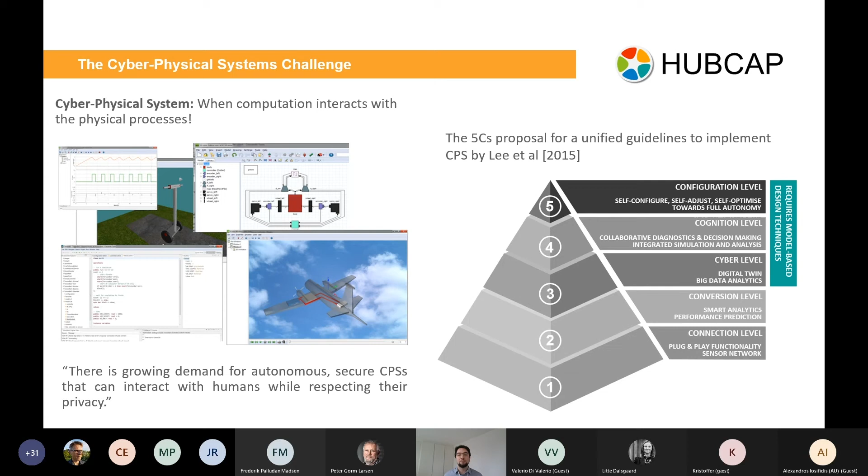It is known that if you're a usual producer of such a system, it's easy to extract some data or start connecting it to the internet. But if you want to include smartness in your products, you will probably need to use some kind of model and model-based technologies. What is model-based design?

Again, in layman's terms: basically there exist two worlds in our vision. A system, real world part — in this case, exemplifying it with the wastewater treatment plant. All the wastewater that our homes, towns, or businesses produce is usually channeled to a treatment plant where the water should traverse a number of tanks. When it's flowing from one tank to another, it eventually has some kind of valve that controls this flow.

If you have a model counterpart of this real world system, eventually you have either syntactical models, like an Overture model, or 3D animations, or block diagrams — formalisms that describe whatever is the continuous dynamic of the flow. All of these are considered models.

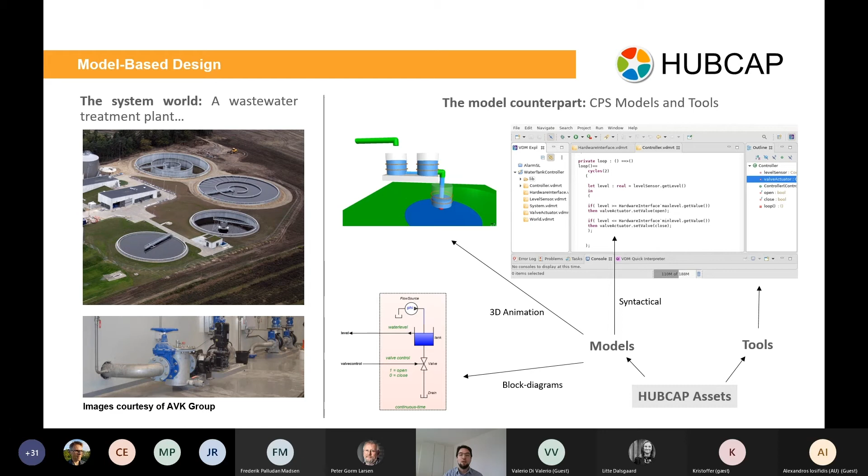We are tool agnostic — if you bring your MATLAB model or some other kind of formal model to our environment, if it has some value, we are willing to host it. Basically, what the project wants to do is enable this interaction between tool providers, be some kind of marketplace where we have catalogs where you can experiment with tools, and eventually facilitate SMEs to both learn or adopt this and test them before they invest in some products.

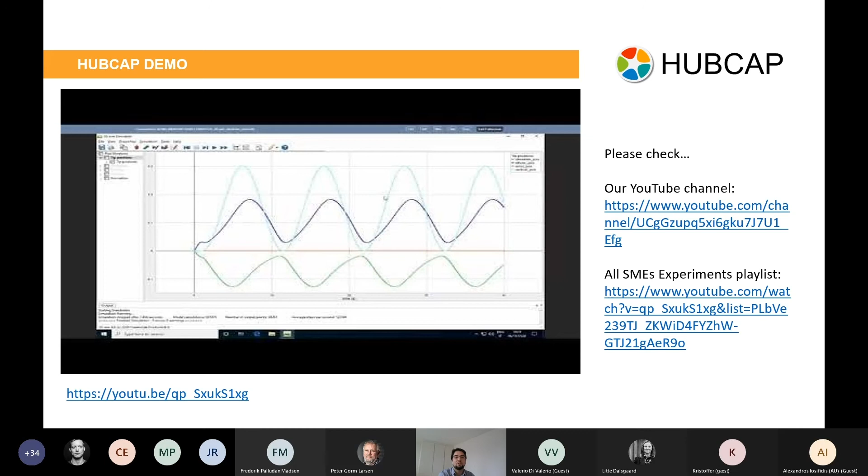You don't see the video if you're trying to play that. Oh, I didn't see that. Somehow on my computer I see the video. Okay, we don't see the video. Okay, thank you for informing me. Well, I think I'll just drop the link in the chat now, because I lost the time for the video.

What are the research opportunities, at least from an academic or research point of view? We are already facing or trying to address some of those, and we foresee that if this is to become a reality, there are many things we used to do for a reason—both to ensure these systems are secure and that you don't share more than what's expected from your machine. That's why, for instance, by uploading this PowerPoint into this session, you only have access to the PowerPoint, not any other access from my machine.

But if we want to break this boundary and have a virtual machine that is both owned by me and somebody else, you will find a lot of potential avenues for research. So who owns the jointly developed assets? Out of my mind, we can immediately see, okay, will we have Git commits that have several authors because both of them were doing the edits on the code in a joint session.

What kind of license will we need if we're running this kind of system where you can just test these tools without any big attachment, but we don't get the tools forever? Maybe run it for a couple of hours for a test. What kind of license will we need to make it efficient and less costly? And well, what are the security challenges? How do you ensure that malicious behavior is not extrapolating from a current sandbox?

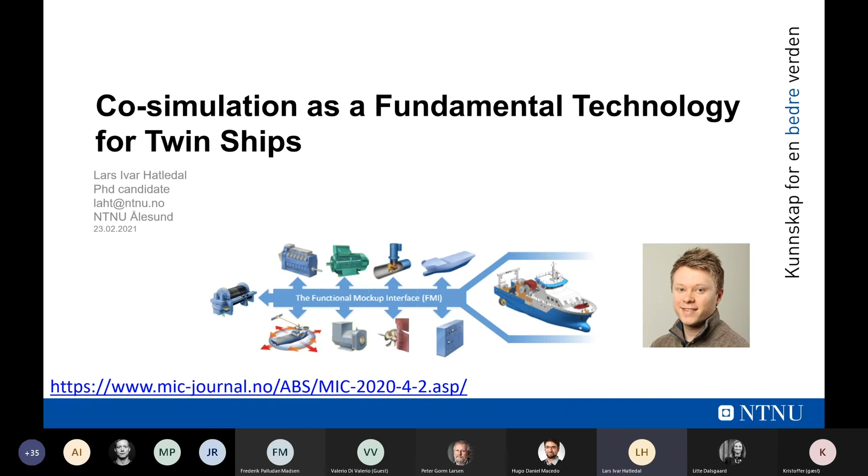The background for this work is basically two projects. It's the KPN twin ship project, where we aim to develop a digital twin of the research vessel Gunnerus. And then there's the SFI Offshore Mechatronics, which is the funding source for my PhD, where I have mostly been developing enabling technologies for co-simulation that we are using for this work.

So the research vessel Gunnerus, it's a small research vessel that is owned by NTNU. So we are able to use this vessel. We can install equipment on board and make them do sea trials and such, so that we can collect data. The vessel is equipped with 2 azimuth thrusters, a tunnel thruster, and it also has onboard equipment such as a Palfinger and an A-frame crane. It also has a ROV.

We have a simulation model of this ship that is modeled in VeSim by SINTEF Ocean in Trondheim. In 2019, the vessel itself was elongated, so they increased the length of the ship. We have a model of this non-elongated ship that has been verified against the sea trial data. And we also have a new version of the model that represents the elongated version. However, this model has not yet been thoroughly validated, but it's based on the old model.

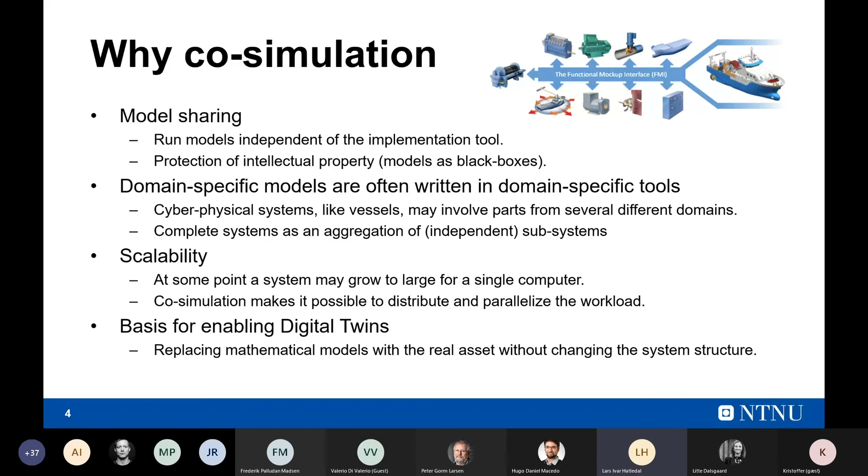So this is the basis for enabling digital twins, where we replace the mathematical models with a real asset without having to change the system structure of the simulation.

So I have developed some enabling tools for co-simulation that is used there. The first one is FMI4J, which is a tool for importing and exporting FMUs for the Java virtual machine.

And then we have Python FMU, which is a tool for exporting FMI 2.0 for co-simulation FMUs from Python code.

And FMU proxy, which allows us to wrap existing FMUs in a new client-server-based FMU. This allows us to create multiple instances of models that do not have that opportunity, and it allows us to run FMUs on different architectures. For instance, if you have a model that only runs on Linux but you want to simulate it in Windows, you can run the FMU in Linux and use FMU proxy to access it from Windows.

And then there's another tool called SSPGen, which is a Kotlin domain-specific language for easing the creation of SSP-compliant archives. SSP is a standard for defining the system structure of simulation. So where FMI is for independent models, SSP is for the complete system. SSPGen makes it easier to create such systems.

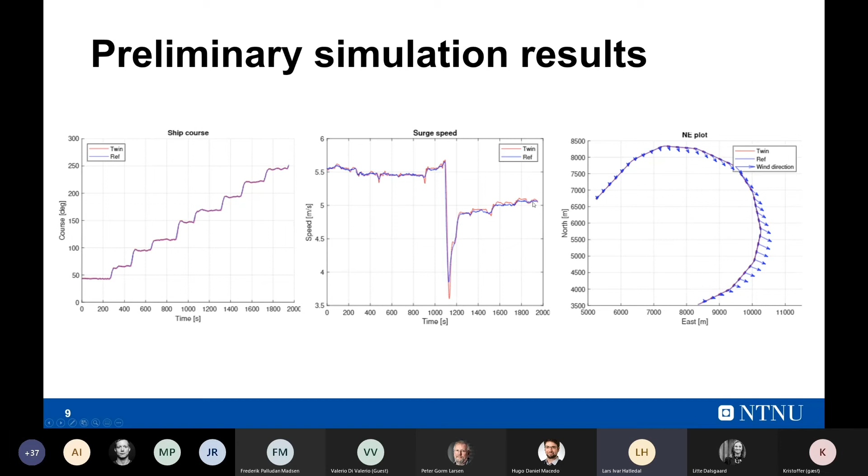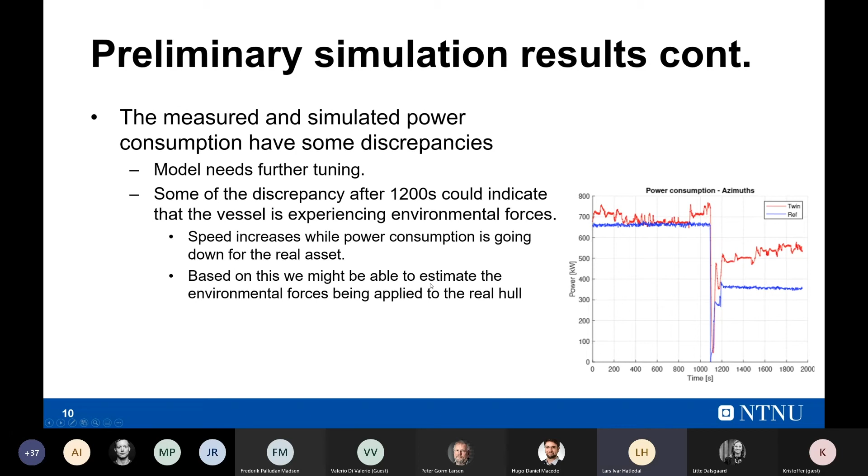But after 1200 seconds, we see something that can be perhaps explained by environmental forces, because the blue line is the power consumption of the real ship. It decreases, while in the previous slide we see that the surge speed actually increases. So that could mean that there are environmental forces acting on the hull, and perhaps in the future we can use the data to estimate the environmental forces applied to the real hull based on the simulation data.

We don't have a live integration with the Gunnerus yet, so we used pre-recorded data. We need to collect and transmit the onboard sensor data in real time, from the different vendors and systems on board, and publish that data over 4G using, for instance, MQTT. Once we have all the data we need, we can package an MQTT client as an FMU and drop it into the simulation, replacing the previously recorded data. Then we would have a live link to the vessel, with data updated approximately once per second.

There is some challenge to this. We already have a computer on board sending some of the data, but NTNU owns the ship, but not the data. So we need to negotiate with the different vendors so that we are able to actually get the data that they own. But once we do that, we would have access to all the data that we can use in real-time simulations.

The conclusion here is that co-simulation allows cyber-physical systems, such as the vessel, to be simulated using models from different vendors and tools, which is great, because then you can have different domains in one simulation. FMU proxy enables the Gunnerus system to be run in a distributed co-simulation master. SSP allows the system to be defined in a standardized way, so the simulation itself becomes tool independent.

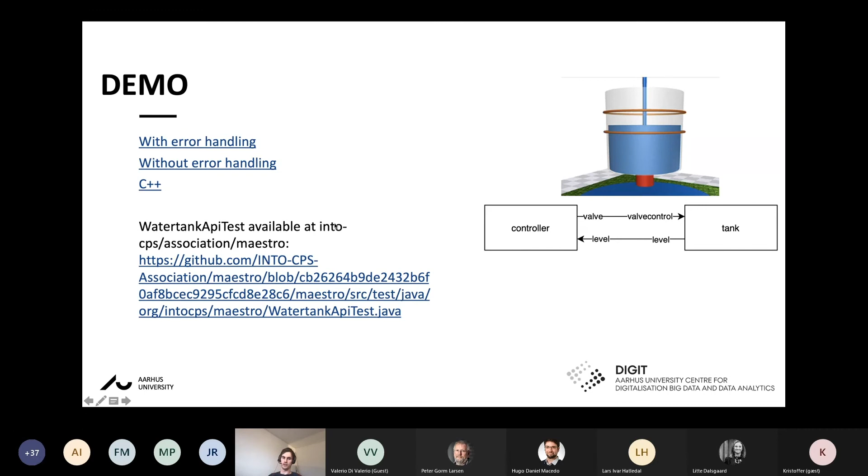In terms of research ideas, we have lots of them. Some are nested and hierarchical co-simulation — how can we create a sound hierarchical co-simulation where the nested level is a co-simulation itself?

We're also looking into automated verification. Simon and Claudio have done some nice work on a scenario verifier that Simon will show later. We're also interested in enriching a MaBL specification with notations like this, which might make it possible to extract these notations and perform automated verification.

We might implement a language server protocol so we can code this in VS Code. Some things on the drawing board include parallelism in this language, and how we can support design space exploration, both running it in Java with an interpreter and going all the way to C++. We have currently enabled environment variables at both levels, so you can code generate a specification once and then just change the environment variables without having to recompile.

We will look into SSP, probably using Lars Ivar's work, and then we're also going to look into X in the loop. Obviously we'll try to use this as an orchestration engine for digital twins. And that was it, thank you.

Thanks, Casper. You didn't talk about the performance gained with the new one compared to the old one, but that doesn't matter too much — we'll hear more about that later, I'm pretty sure. It's the performance is not new, that's why it was not part of this presentation. It's still very performant, that's fine.

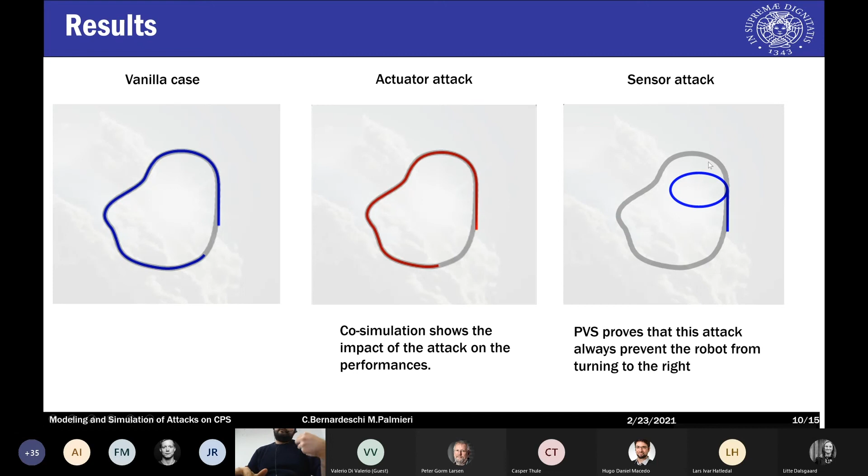As far as the sensor attack is concerned, the co-simulations have validated our formal analysis in the sense that when the attack kicks in, the robot starts turning left. It makes a circle, and it will never be able to follow the path again.

We can also model interactive attacks with the PVSio-web extension of PVS. So we can create a user interface where we can choose when to start the attack. When the user pushes, for example, actuator 0, it implements the attack that switches off both motors.

When the user pushes sensor left black, it triggers a function that forces the values of the left sensor to black. With the stop button, the user can stop the attack and let the robot follow its traditional control algorithm. In this example, we can see that at a certain point the sensor left black attack was activated.

The robot started to turn left and make the circle. Then, while it was in the middle of the path, in the center, the actuator 0 attack was selected, and the robot just got stuck in the middle, in the center of the path.

There are some limitations to this interactive attack. The attack is now not dependent on the co-simulation step, it depends on the choices of the users. The problem is with these values assigned to sensors and actuators, because they can be different values, but they cannot be changed during the co-simulation.

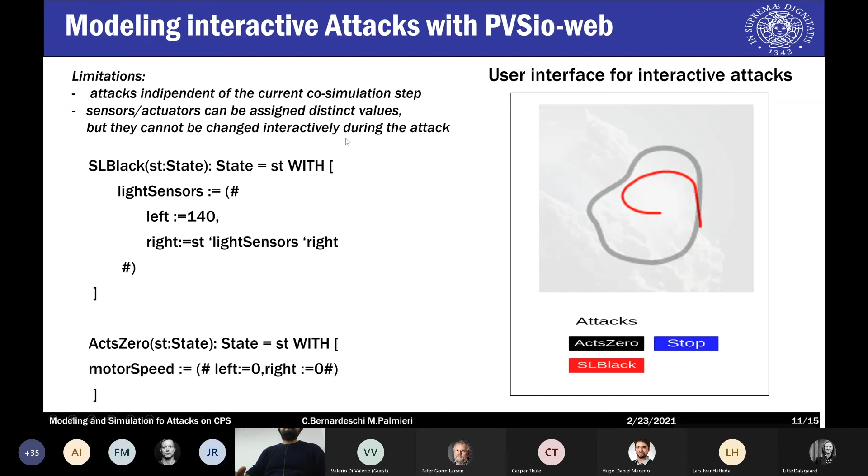So we can move one step forward. We can also model the plant with PVS. This requires another extension of the state in which we also include variables for the plant, for example the X coordinate, Y coordinate, the angle for direction, linear speed, angular speed, and the step size of the co-simulation.

Then we update the time progression function with functions that compute these new variables. In this case, it's just update position and update speed, so I will not enter into the detail. These functions have been created using data coming from different co-simulation runs and from analysis of the model.

We can use co-simulations to compare the behavior of the new system modeled entirely in PVS with the original co-simulation provided by INTO-CPS, in which the plant is modeled with 20-sim. We can set some tolerance, and if the PVS system does not achieve a certain tolerance, we can improve it with more detailed functions for the plant. In this case, we decided that an error of 5 centimeters was tolerable, so we used this model.

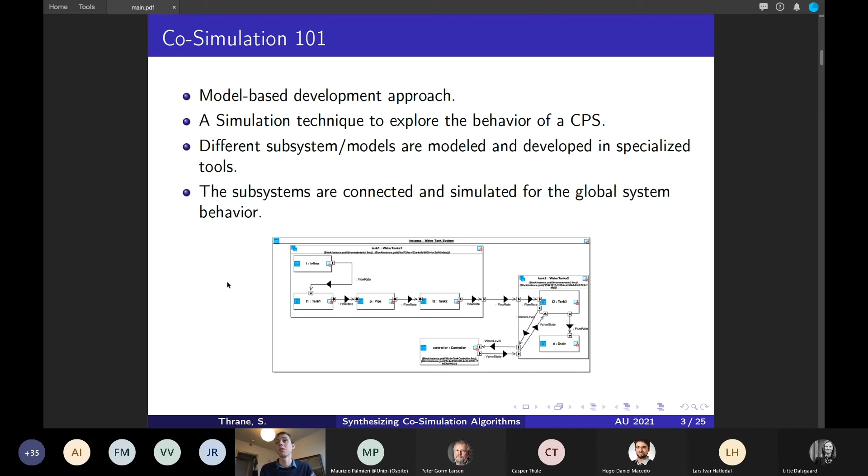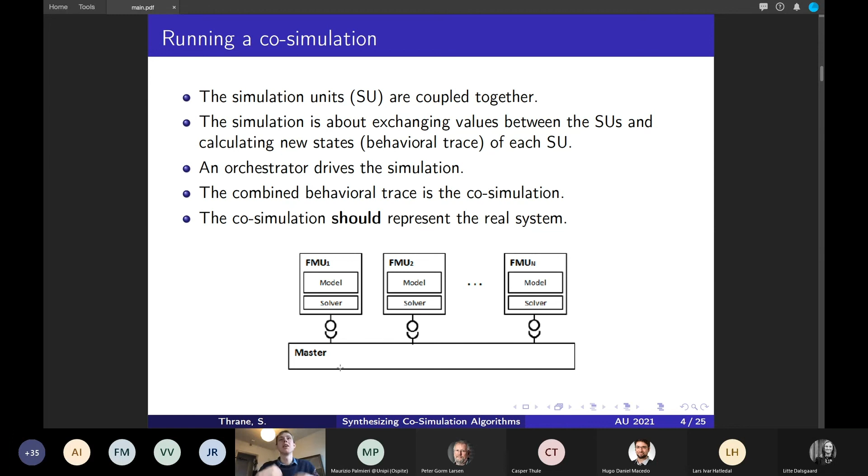You have already heard quite a lot on co-simulation, so I'll just say it's a simulation technique to explore the behavior of a cyber-physical system. When you're running a co-simulation, you have these different simulation units, often called FMUs, which you couple together by saying inputs and outputs share the same value. The simulation is about exchanging values between the different simulation units and calculating their new states or behavioral trace. An orchestrator, which we also refer to as a master, drives the simulation, and the combined behavioral trace of all the simulation units is the co-simulation. The goal is that the co-simulation should represent a real world system.

When we look at the orchestrator, it's really an algorithm that describes how each of the simulation units acts during the simulation, how data is exchanged between the simulation units, and how new states are calculated. At a high level, as Casper told you about earlier, you get an output using the get function, you calculate a new state using the do step function, and obviously the result of the co-simulation is extremely dependent on what you do inside the master algorithm.

We can look at what can make a co-simulation incorrect. If you have an error in one of your simulation units, that obviously affects the co-simulation result, but also an incorrect or non-optimal co-simulation algorithm would have a big impact on your co-simulation result. It could simply be that values are not exchanged in an optimal manner, or that if you have any algebraic loops in your scenario, they are not being stabilized. It could also simply be that the simulation units are not synchronized. I'll get back to this in this presentation.

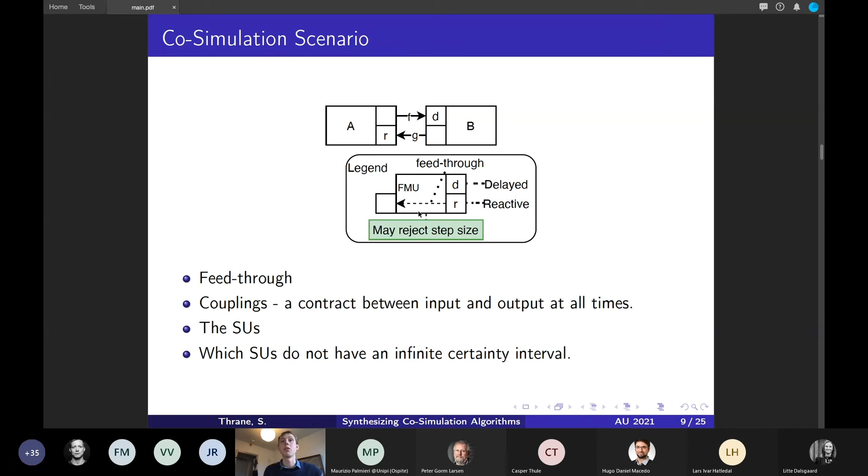In a scenario, we describe it like this: we have different simulation units here, with different ports. We have some input contracts - basically the input approximation function on the different simulation units. We have the couplings, and a coupling is basically a contract between the inputs and outputs, holding at all times. This just says that the value on the output port here and the value on the input port here should be the same at all times. We also want to say that a simulation unit may reject to take a step of a certain size, and we also denote that in the scenario.

We also have the simulation units, which represent, as you already know, a dynamical system having a state that evolves over time. You interact with the environment through these couplings, and then you can calculate its future state within some time interval. It adheres to a well-defined interface, like FMU or FMI. The way you calculate a future state, you use assumptions, because as I mentioned, the couplings are a contract at all times. So whenever you are stepping, calculating a future state, you might need to assume how the values on your input port develop over that period of time.

And there are two schemes: we have a delayed contract, where you use extrapolation, and we have the reactive input ports, where you use interpolation.

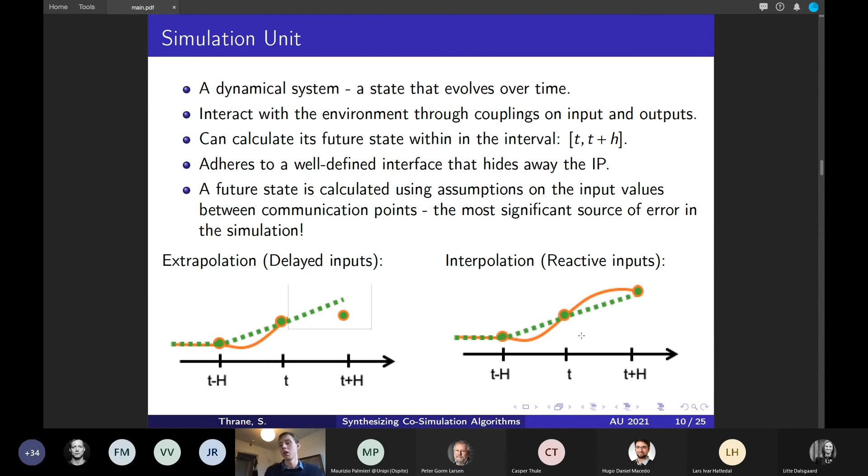When we're down to the master algorithm, we obviously want termination and time progression in it, but we also want the way we exchange values, which we refer to as communication points, to minimize the error introduced once we calculate new states. All simulation units should move in lockstep, and if one of the FMUs rejects a step, we should correct it by backtracking the simulation and trying again. If we have any algebraic loops, they should be stabilized by obtaining a fixed point. I tried showing it like here.

Synthesizing a master algorithm is actually quite simple. It's simply a matter of saying, okay, which actions should be in the master algorithm and in which order. On the actions: all the coupling restrictions should be satisfied, meaning for all output ports we should do one single get operation, and for all input ports we should do one set operation. Then we should calculate new states for all simulation units by performing one step operation.

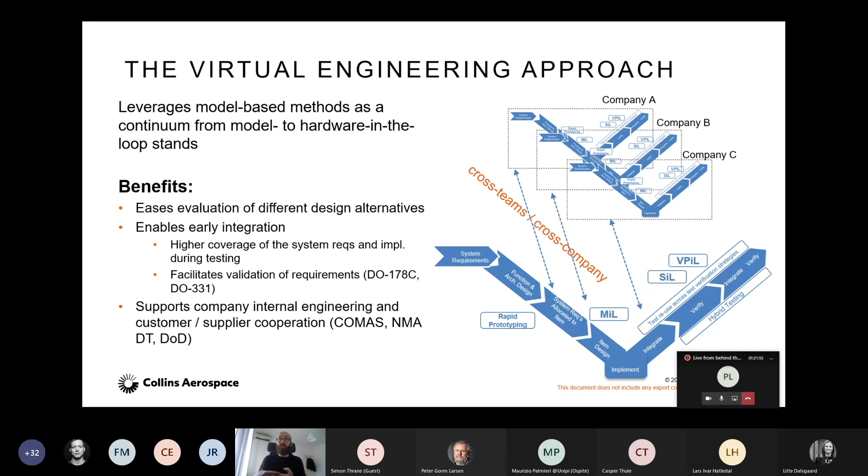One of the things worth mentioning is that the virtual integration approach supports not only company internal engineering processes, but it is also useful for cooperation between different suppliers, for customer-supplier integration, where each of the two partners develops a specific component, and using virtual prototypes simplifies a lot the overall system development.

Unfortunately, virtual engineering doesn't come for free, but brings some other challenges we need to cope with. Even virtual integration is not always easy, because there are several tools, modeling languages, and modeling formalisms used by different companies, or even within the same company, where different groups use different tools and languages. This makes virtual integration sometimes problematic because you have models and people that cannot talk to each other.

On the other hand, it is also true that you have different domains in a cyber-physical system: the functional domain, the cyber domain, and the physical domain. Different domains usually require specialized modeling environments, and this is further complicated by intellectual property protection, which is another important issue to address when dealing with external supplied subsystem components.

At the root of all these issues, in our opinion, there is the lack of a standardized model integration platform, which limits model reuse across different analysis and verification strategies, limits collaboration, increases the modeling effort, and sometimes decreases the benefits of adopting a virtual engineering approach.

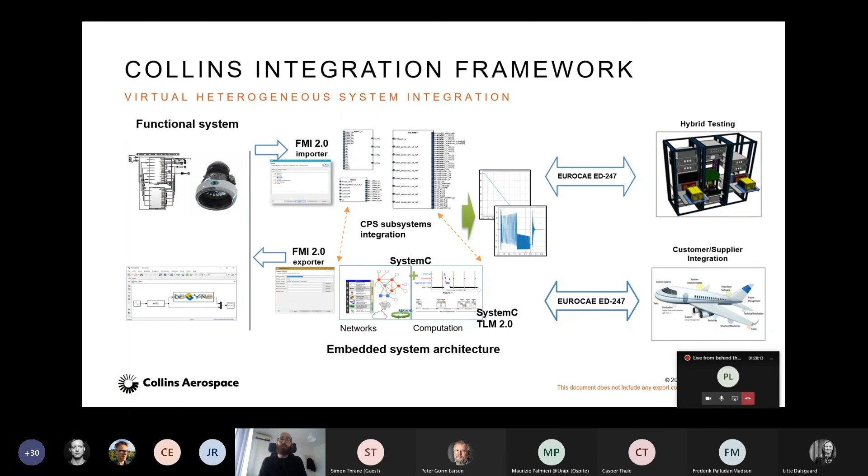Before closing this presentation, I would like to spend a few words on our standardization activities, because we also try to contribute to improve the future versions of the standards that we use. For example, FMI is good for co-simulation of physical systems where you have differential equations and continuous time, but it's a challenge to co-simulate mixed discrete and continuous behaviors. This is a limitation of the current version of the standard.

For this reason, in collaboration with universities like Berkeley and Pisa, we proposed a few years ago some modifications and extensions to the standard to be able to cover co-simulation of hybrid systems, where we have this combination of mixed discrete and continuous dynamics.

Another example is our work presented this year at the SystemC Evolution Day, a workshop promoted by Accellera to advance the SystemC ecosystem. This year, we proposed an approach to extend the SystemC TLM 2.0 standard for the model exchange of network protocols. To the best of our knowledge, there is no existing standard which allows the model exchange of off-chip network protocol models.

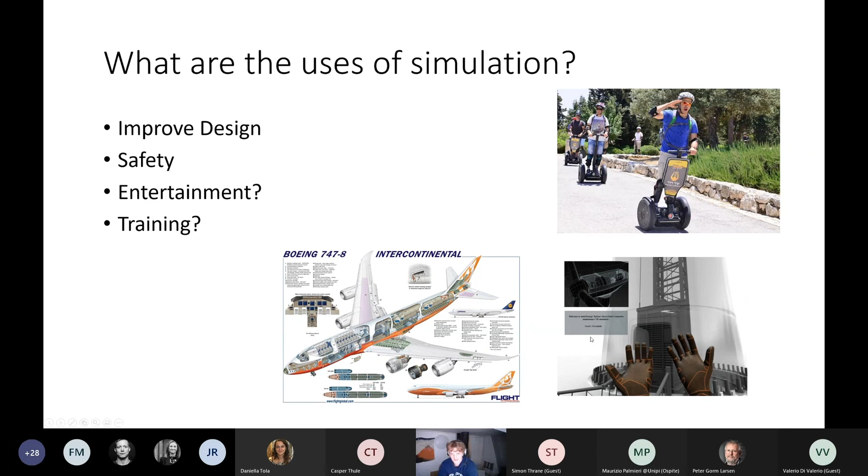Hopefully by now you have an idea of what at least the goal of the functional mockup interface standard is. It's really just to make it possible to put together models using different formalisms, so we can hopefully reuse a lot of models and build products more quickly. And it's touted that they support more than 100 tools. This is true to some extent, because sometimes the implementation of the standard is not 100% correct, so it's much of a commitment to implement this from scratch.

So if you want FMU, you can choose one of these 100 tools that might be free, some of them commercial. But the question is, what if you want to do something that is outside these domains? So if you, for example, want to do machine learning, use deep learning models inside your co-simulation, capture user input, or do some plotting or a small adapter piece of code that goes between 2 models, then you're kind of in a bad situation.

So the specification is long. You have all these C functions you need to implement, and you have to write a lot of XML schemas by hand. And this is not ideal. So what if we could take all of this stuff and put it into one box and implement it once and for all, and just use that for different languages?

And that is what UniFMU can be used for. It's a command line tool that implements this interface, and it essentially defers the implementation to the source language of your choice. Right now, this is implemented for Python and C#.

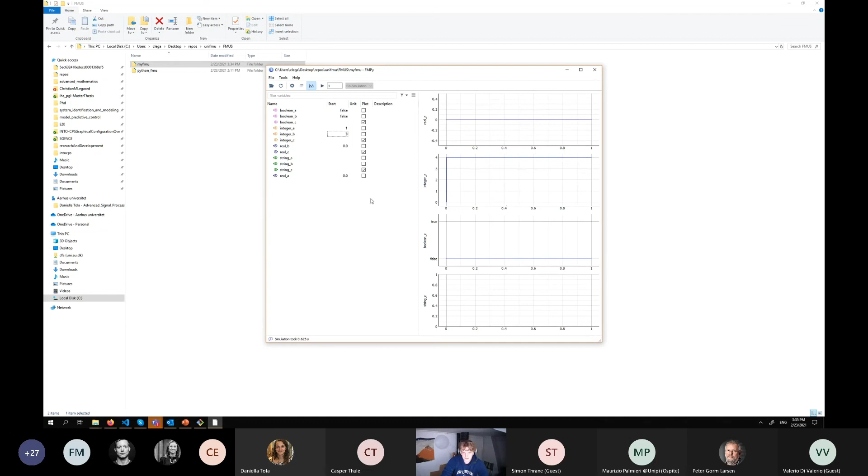Now, if we want to change something, suppose that we want something a bit more complex, we can just go in here. Let's say that we want to multiply. So when we update the output, we want to multiply this by maybe the time. So we can just add another variable like this. Here, let's set the time to 0 initially. And the do-step, we can just set the time to be the current time. Something like this. And I believe without reloading it, we should be able to actually run this.

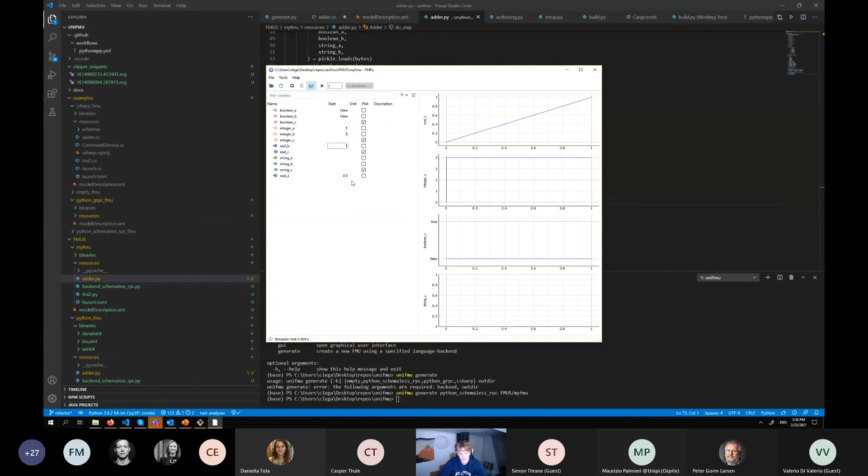Now you can see it's 1 plus 0, which is 1, and then multiplied by the time. And if we simulate for longer, hopefully it will still work. Yeah, so it goes to 10. So that's the gist of it.

Where are we on time? Plenty of time. Okay, that was the demo.

So how does it work? Essentially the idea is that normally you would have to implement your actual implementation of the FMU inside of a dynamic linked library. On Windows, these are called DLLs, on Linux, they're called shared objects, and on macOS, they're called dylib or something like this. So that's one of the pains, that you have to cross-compile it if you want it to work on all platforms. Rather than doing this, we can write a single implementation and simply have it call into this script, for example. And this is what I've tried to show here.

So when the simulation tool calls FMI instantiate, it loads this library that you provided free of charge. And it then reads this configuration file, and it will launch a command using process open, popen more specifically. And this is also why it's very flexible, so this command can do anything. It could be opening an SSH connection into a remote computer and launching the FMU at that location, as long as it can connect back to the wrapper itself.

Yeah, so I think let's just stop it here. And if you have any questions, you can ask.

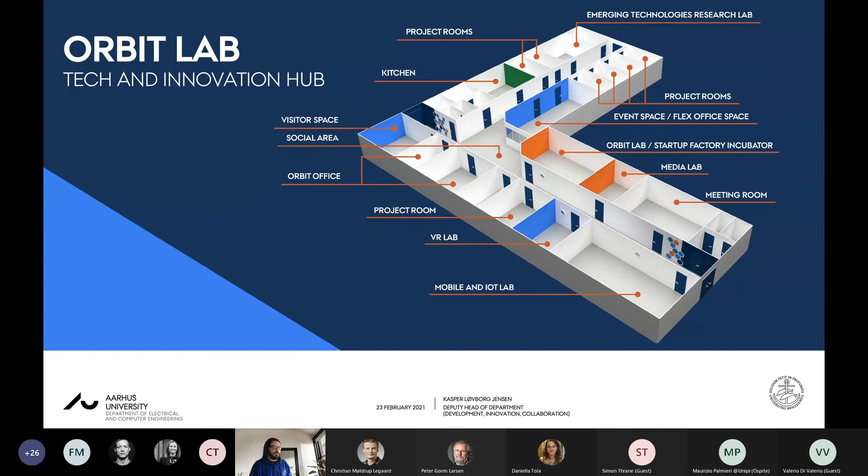The heart and core of Orbit Lab is the community. So we launched in December 2017, so we're a bit more than 3 years old officially. We also had a bit of a beta period, and actually, as you can see, we've grown a lot over those years. I'm not going to play this video, but you're very welcome to try and see if you can grab that. Maybe somebody can, maybe Lida, you can dump the link for the video in the chat and people can have a look after if they're interested. That gives a much more vibrant kind of view of the activity.

So we started pretty much from zero, and now we have, this will be, I guess, our 70th kind of shared event, tech or entrepreneurship oriented event. We have grown the community. It's now more than 2,600 people, and we've had 2,800 people participating in a broad range of events and activities that I'll get back to.

And also an important fact about what we try to do with Orbit Lab in this kind of getting out from behind the walls, as this kind of series has been called, is to open up. So we've had a lot of visitors from everything from schools to high schools, for like students who are considering to go into engineering, to companies or municipalities who are interested in exploring the potentials of these new digital technologies.

Of course, we can't do all of this on our own, so we're very happy to have had some great partners along the way. We have these 12, we call them our founding partners, or founding fathers if you will, who kind of believed in us before Orbit Lab was actually a thing. So we went around and pitched the concept, like, can we build this dynamic knowledge community embedded in the middle of the research and engineering that goes on at Aarhus University, and for all of us to share and come and have a great community to interact about all of these things. And this is a mix of big international companies, but also very strong locally anchored companies like Grundfos and Systematic and Trifork. So we've had a lot of benefit out of this collaboration so far.

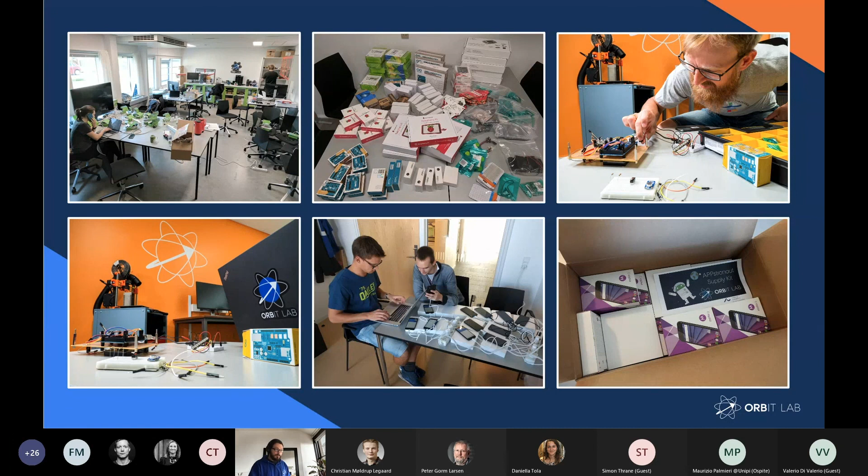We have a lot of tech talks, with experts coming in from industry talking about not only the research side, but also industry best practice for software development in large computing systems, in the bank sector for instance.

We have a lot of workshops where people learn new technologies. We host hackathons and competitive programming events. This Thursday we will have the Google Hash Code event, a global competitive programming challenge where you can sign up with a team and come work in Orbit Lab.

Obviously none of this is happening physically right now because of COVID, but we hope we can get back to this, because we really miss having these events.

It's a very diverse community of people from many different domains, ranging from healthcare to production to pretty much any sector. We have a lot of public sector municipalities coming in wanting to work with new technologies, for elderly care for instance.

Another thing we really strive to do is integrate innovative new technologies into the education. We do a lot of co-curricular and extracurricular activities directly linked to the courses, so that students, if you're studying to become a software engineer, you might want to learn machine learning way before you actually get the machine learning course later in your education.